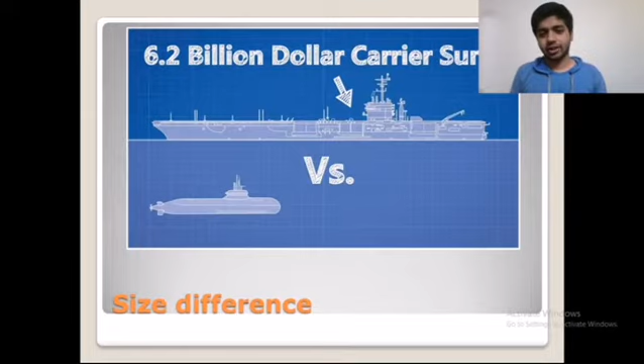Now, what's even more astonishing is the fact that this Gotland submarine not only deceived this aircraft carrier, but it deceived the whole fleet. Now, let me put that in context. The whole fleet consists of fighter aircraft, the aircraft carrier, and fighter ships, and they are equipped with modern radars, modern sonars, and they have the most modern torpedoes, only designed to find and kill the enemy.

Yet Gotland entered the red zone. It targeted USS Ronald Reagan from very close proximity, fired multiple torpedoes, sunk Ronald Reagan without being detected, and went back. So how did Gotland achieve this? Well, this brings us to the topic of my presentation: stealth and the Stirling engine.

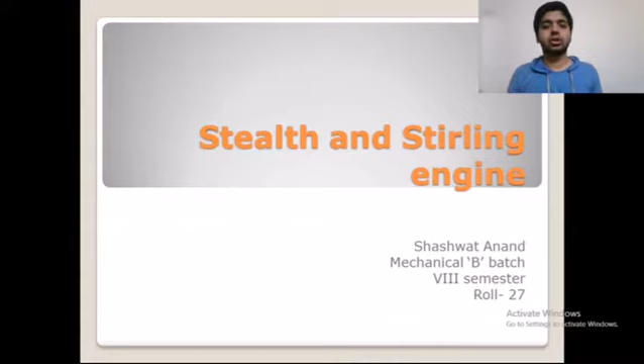Now, before we talk about stealth and the Stirling engine, I would like to first talk about what sonars are. Well, sonar is basically the acronym for sound navigation and ranging. These are devices which are used to detect objects underneath or on the surface of the water. Now, how do they work? Well, the ship which is carrying a sonar sends a sound pulse, which we call a ping.

It goes down, and if there is no object between the ship and the bottom of the sea, it will simply get reflected. But if there is some submarine, as you can see in the graphics, then the sound wave will get reflected and it will be received, which is known as a ping, and it will be detected by a detector already present in the aircraft carrier. And by this, the people in the aircraft carrier would get to know that someone is beneath them.

Now, this is known as active sonar. What do you mean by active sonar? Well, active sonar is actively sending the sound pulse and receiving the reflection. But in modern warfare, Navy officers don't use such active sonars. The reason is the moment you send the sound pulse, you are also disclosing your location to the enemy. And the moment you are receiving the ping from the submarine, you might be receiving a missile too. So in modern warfare, people usually use what is called passive sonar.

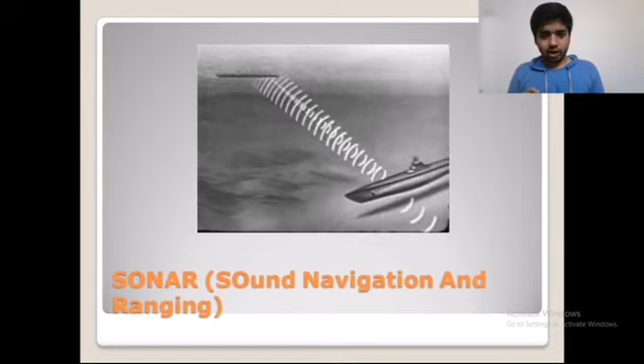Now, in passive sonar, you don't send any signal. You just put on your electronic ears and listen to whatever is happening around you. This way, you get to know about any enemy in close proximity to you. Now, in order to be able to listen, you need to be stealthy. Now, what is stealth? Stealth is basically being virtually invisible to your enemy, going out, hitting your target, and coming back without being detected. That's stealth.

So in order to be stealthy, you need to focus on two major points. The first one is to reduce your own noise, because if you are noisy, the enemy will get to know your location before you get to know about them. The second is to listen thoroughly, because if you are not listening thoroughly, the enemy cannot be detected and you will be just as vulnerable.

But if we look at these two points, the second point can easily be covered if we cover the first point, which is to reduce your own noise. If you reduce your own noise, you will be able to hear more clearly and more thoroughly everything that is happening around you. Now, how did Gotland achieve this feat at so little cost? Well, Gotland used what we call a Stirling engine.

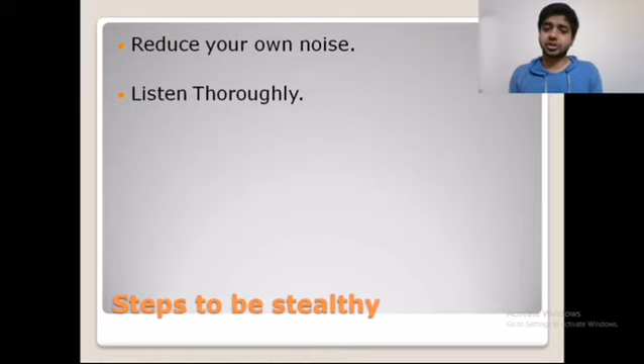It was the first ever submarine which used a Stirling engine. Now, the Stirling engine is not a new concept. We don't have to go into the future to know about the Stirling engine. We actually have to go 200 years back. It was invented by Robert Stirling in 1816 after a series of blasts which were occurring in steam engines during the Industrial Revolution. He just wanted to build a safer engine which does not operate on steam.

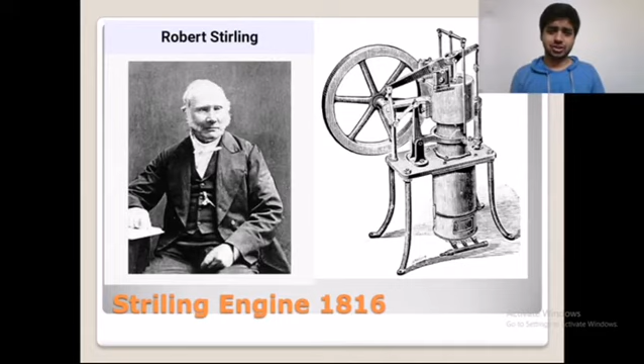Now, this engine works on a basic principle: whenever you heat air, it expands, and whenever you cool it down, it contracts. In order to see this phenomenon, you don't have to go to any experimental lab or anything. You can just find it in your own household kitchen. This phenomenon was first used by Robert Stirling, and it is basically a 4-step process.

In the first step, the system goes from state 1 to state 2 at constant temperature, which is at high temperature, where heat is added. Now, it goes from state 2 to state 3 due to the inertia of the flywheel motion. It is basically an isochoric process, a constant volume process. The step 3 to 4 is achieved at a constant temperature, which is lower than the temperature at state 1 to 2, where the heat is rejected. Now, state 4 to 1 is achieved using the inertia of the flywheel.

Now, on the right side, you can see the TS diagram. It is just derived from the PV diagram that is drawn on the left side. The engine was highly inefficient. In order to increase its efficiency, regeneration was used. It was still very inefficient, and it became obsolete after steam engines were built with high quality steels, which were not vulnerable to high pressure steam. As a result, the Stirling engine became obsolete.

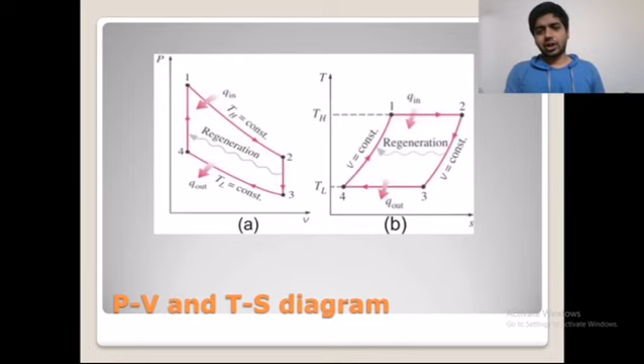But recent experiments and research proved that the Stirling engine's efficiency can be increased and it can be used. Now, I would like to first demonstrate how the engine works. It's basically a 4-step process. The first step is heating. The red zone is the heat zone. The second one is the power stroke. The third one is full expansion, and the fourth one is contraction.

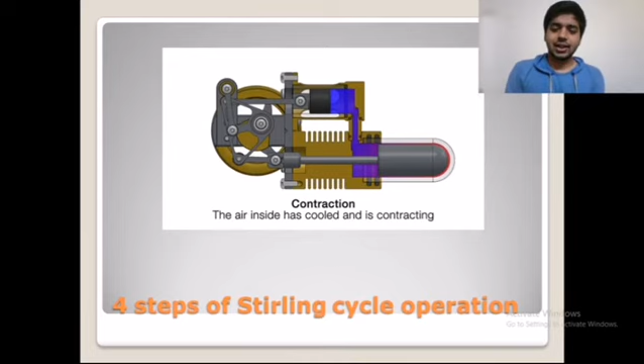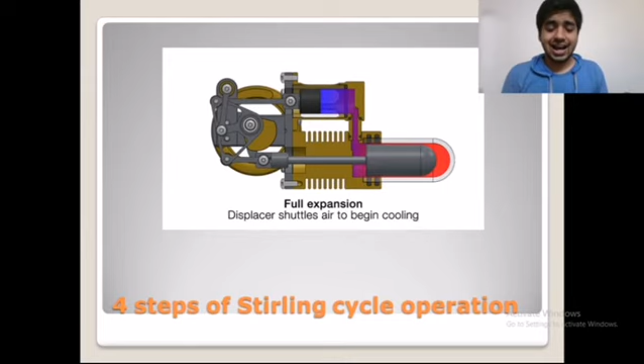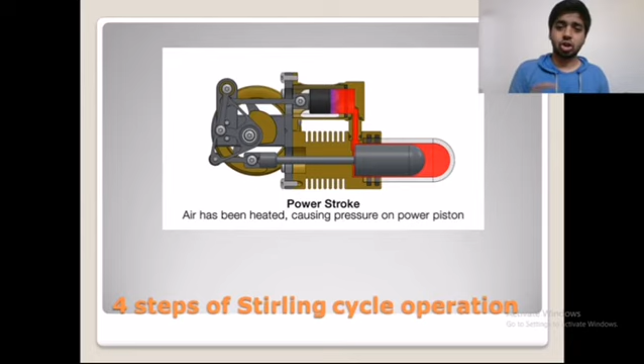In the heating zone, the air is heated, which presses the piston. The air then goes to the upper section, where it is cooled down using forced convection, and then it is allowed to come back, pushing the piston back to its initial position. This reciprocating motion is then used to rotate the flywheel and to produce power. And the engine works like this. This is the free working of the engine without any jerk.

Now, how is this engine better than the diesel submarines and nuclear submarines that we are seeing a lot in this generation? Well, first we'll talk about diesel submarines. Diesel submarines are just IC engines, and in an IC engine we have controlled explosions, and a controlled explosion produces enough sound that can be detected within a range using electronic ears.

Now, if we talk about the cutting edge technology, the nuclear submarine, on paper they are very silent in operation, but during operation the coolant needs to be pumped in high amounts to prevent overheating. The pumping of coolant causes enough noise that can be detected by a submarine in near proximity, and they can fire a torpedo before the nuclear submarine crew gets to know.

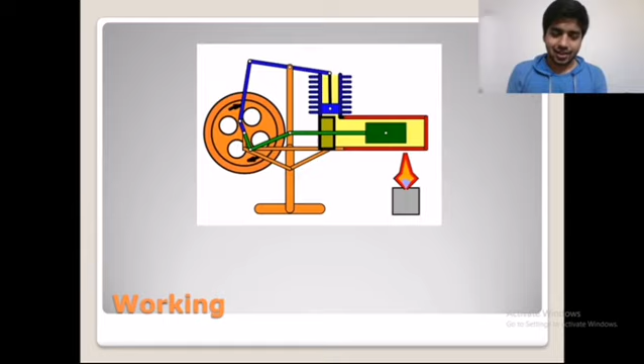So now, the Stirling engine doesn't have any explosions. It doesn't need to be pumped with high amounts of coolant, and thus it is very silent in operation. And that is the reason why the Gotland submarine, which used the Stirling engine, had an upper hand against the world's best, the US Navy.